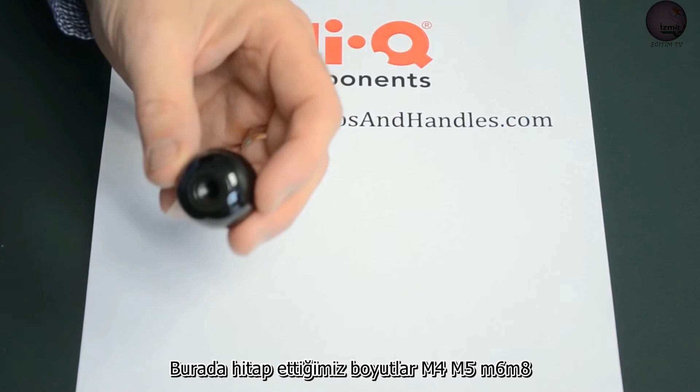These are made in black Duroplast, a good plastic material. It's got the moulded thread. Thread sizes we cater for here are M4, M5, M6, M8, M10 and M12. In most of those sizes there are several types, so nice smooth black Duroplast ball knob.

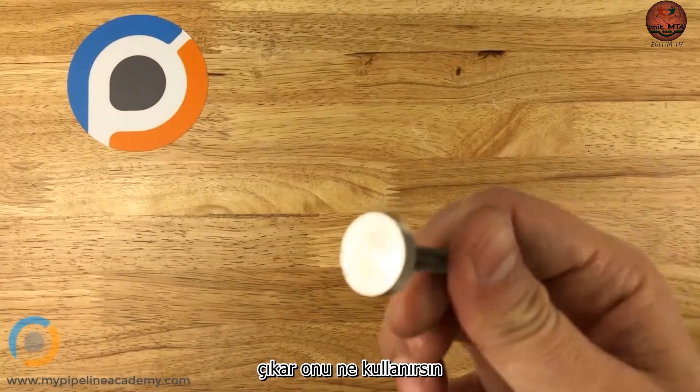This is an example of a thumb screw. A thumb screw is basically a screw, but it has a larger diameter, and often on the diameter you'll see a knurled surface. This is a metal screw.

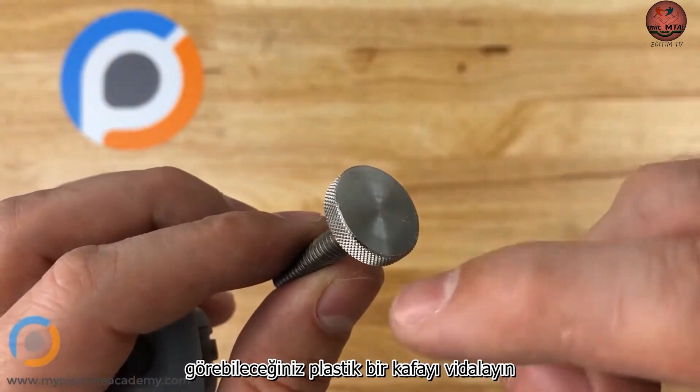Knurling is a machining operation that can be applied to metal parts. So this is a nicely textured surface that gives you better grip when applying torque to the screw. On a plastic head you might see little scallops patterned around the diameter instead. Anyway, it provides an easier interface for a person to use their fingers to screw these in or out.

That makes it really easy to install or uninstall some kind of screw without any tools. The downside to using a thumb screw is that it's harder to really torque it down tight because you're using your fingers and not a metal tool. So you might not use thumb screws for applications where you really need to torque down a screw tightly, but in applications where it doesn't need to be torqued down tightly, and especially when you need to remove it or just back it off a little bit.

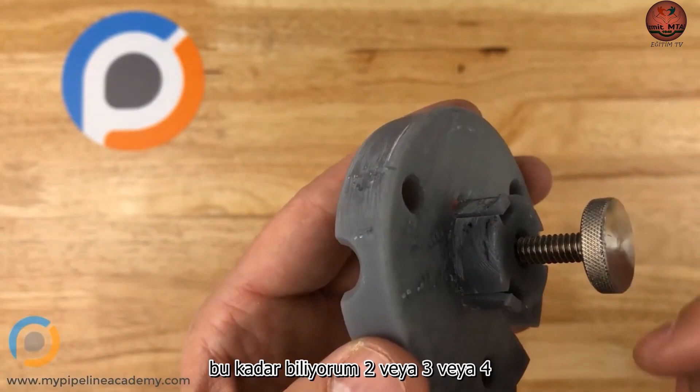In this part here, there are some other parts on this side that I'm not showing, but when we screw this in tight, it locks this in place and prevents it from rotating, which is what we wanted. We also wanted to be able to back it off just a little bit, 2 or 3 or 4 turns, and that would loosen it up enough that you could rotate it like this, which is also what we wanted. You rotate it into the right place, and then screw this back in. That's how we used it.

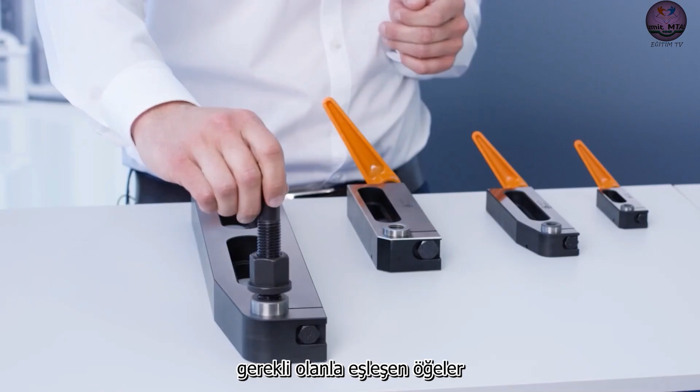As you can imagine, machining in this area will generate vibrations, which can however be suppressed with the help of the bedding support. The bedding support contours to the workpiece with a light spring load and is locked in place.

The supporting element is used for the same application as the bedding support. It sports a compact design, is comfortable to handle, and provides tremendous supporting force. You can screw a variety of elements into this tool as well to match the required construction heights. Simply position it at the fixture, lock it in place, and you are done.

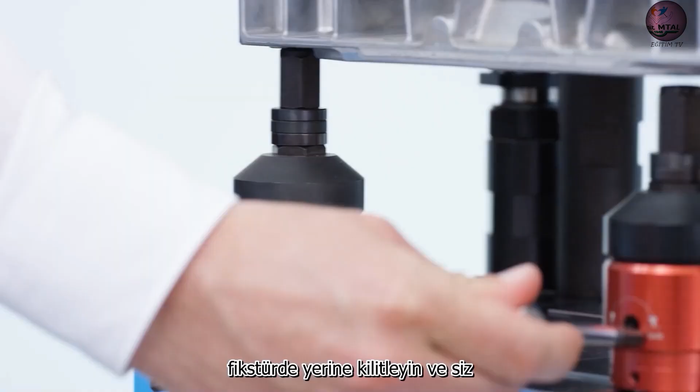The floating clamp is used at overdetermined clamping points as a means to prevent vibrations and oscillations. The clamping jaws can move freely. They are swiveled in, allowing the jaw to contour to the workpiece with a light spring load. When you tighten the screw, the upper jaw will make contact, clamping the workpiece and locking in place the height of the floating clamp.

This will not affect the position of the workpiece. Available in various sizes and versions, it can be equipped with different clamping jaws.

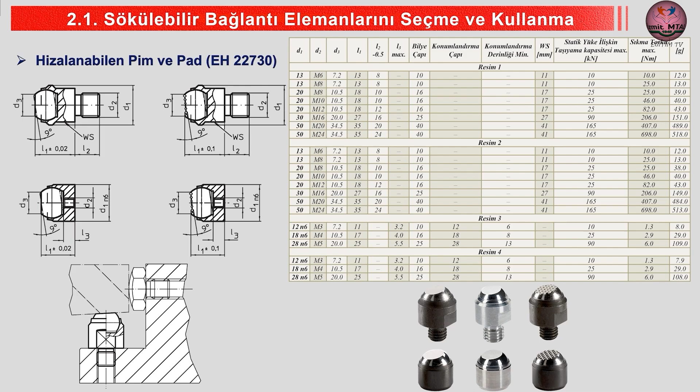With a taper clamping unit. The taper clamping unit is used for multiple clamping systems. It is made up of a taper and two clamping jaws. As the name suggests, the two clamping jaws are pushed outward as soon as the taper is moved down by means of a screw.

You can use the taper clamping unit in different sizes and versions on your self-made fixtures. Another option is to use the taper clamping unit on our flexible multiple clamping system. The system lets you clamp a wide range of workpieces quickly and with ease. The clamp and the stops are installed on the bar at the appropriate position.

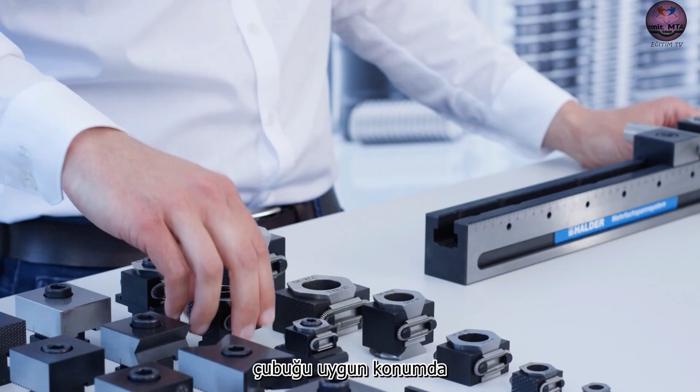The workpieces can afterwards be inserted and clamped. For longer workpieces, it is possible to install two bars side by side.

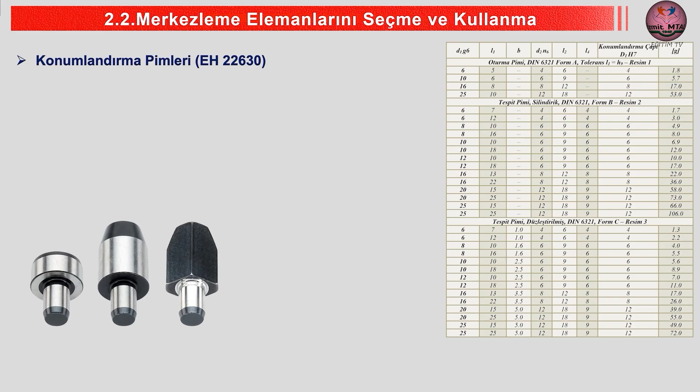And suppress vibrations: seating elements, down-thrust clamps, and down-hold clamps. Here you can see a large selection of seating elements, the right one for every application. Ribbed, spherical, ground, orienting, or height adjustable. Better still, they also come in various materials, such as plastic or case-hardened steel, and with hard metal inserts.

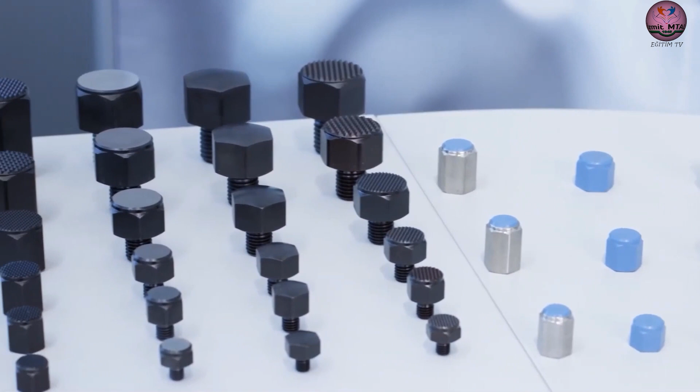Let's take a closer look in a fixture, shall we? At this point, we selected ribbed elements for the support surface. Here is a tapered version. Serving as a stop is the pin ground on the inside.

Offering versatile use, down-thrust clamps are clamping devices designed for vertical clamping. Available in different sizes, they come in a swiveling and in a movable version.

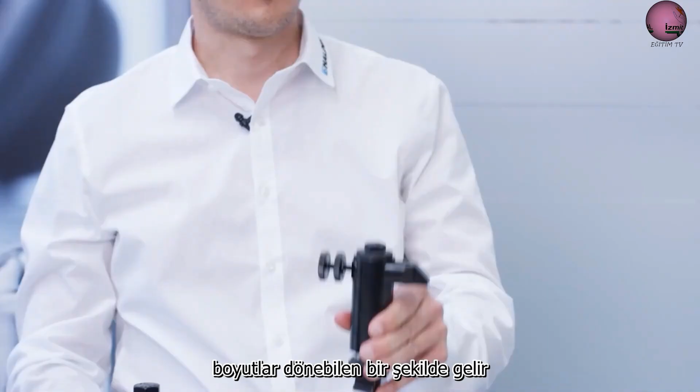Let's take another look at a real-world application. Here we have the swiveling version. The down-thrust clamp is swiveled in and clamped by means of the clamping screw. The positioning ring ensures that the clamping position is defined with perfect repeatability. The thread can be used to adapt each clamping insert as needed.

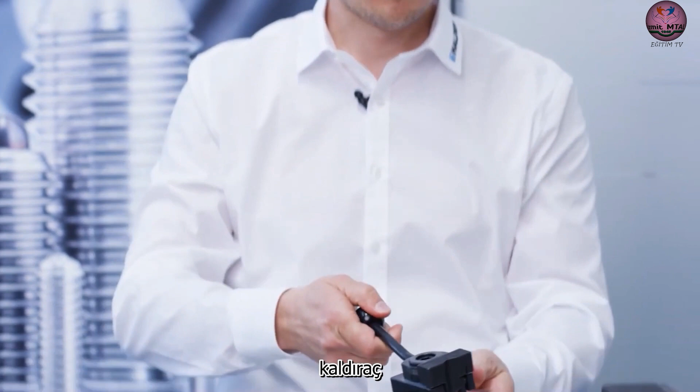Downhold clamps are designed for the vertical clamping of workpieces. They are made unique by their flat design and their pull-down effect. They are available in an assortment of sizes and versions, for example, with a lever or ball-ended thrust screw. Yet another version is the subpart clamp, consisting of a stop and a clamp.

As the name suggests, this tool is positioned below the workpiece, allowing you to utilize the entire machine table. The clamping force is applied horizontally with a pull-down effect when the screw is actuated.

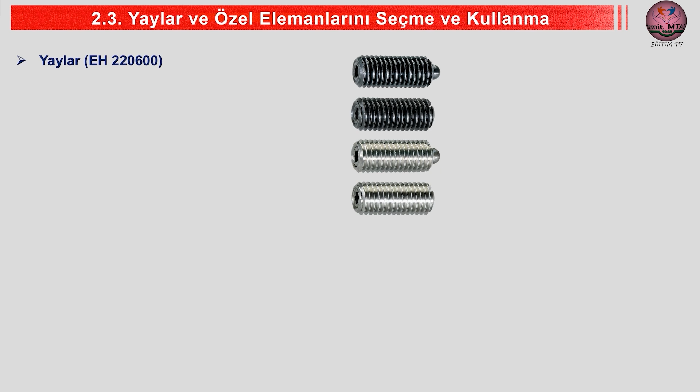Fixing, positioning, latching, rolling, switching - all these are functions for which spring plungers are used. I bet you've already had contact with one today. Maybe when flipping the light switch or adjusting your car radio using the rotary knob.

Let's take a look at this with an example. For this purpose, I have prepared a rotary knob for you. In it, the function of the spring plunger can be seen very well. The ball engages at the defined position.

We can supply you with the right variant for every application: with head, which serves as a fixed stop; with a rolling ball, to reduce wear on the mating part; or the self-clamping variant, which allows high tolerances in the locating bore.

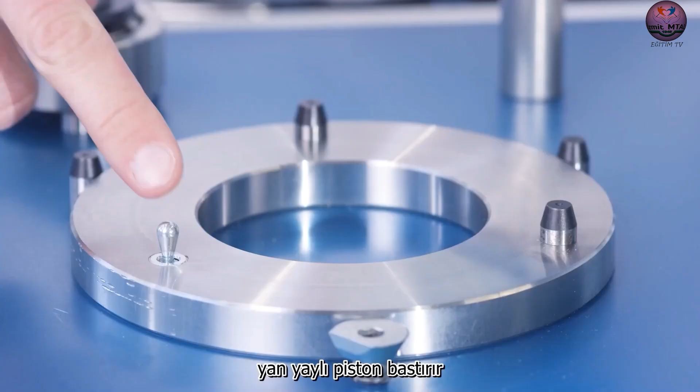For lateral locking and positioning, our lateral spring plungers are used. For this, we look at a workpiece positioning. The lateral spring plunger presses the workpiece against the stops during insertion.

Typical application examples are positioning during laser marking, painting and sandblasting, blank fixing, or workpiece pre-positioning. We offer variants with external threads, which can be flexibly adjusted in height, as well as with surface-protecting plastic pins.

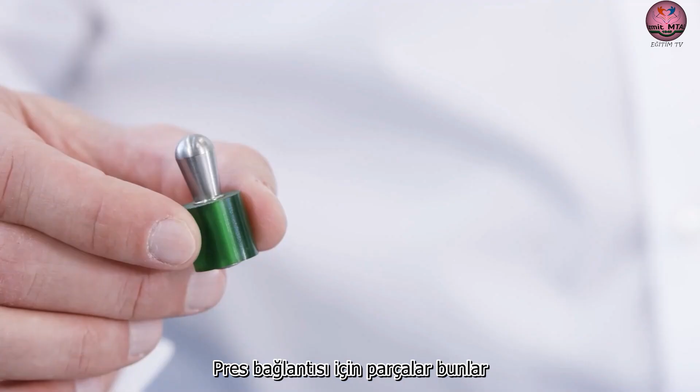Furthermore, side thrust pieces for press fitting. These are insensitive to chips and dirt, as the plastic body serves as a spring. For high clamping forces, there is the version with spring plate, which can be flexibly positioned.